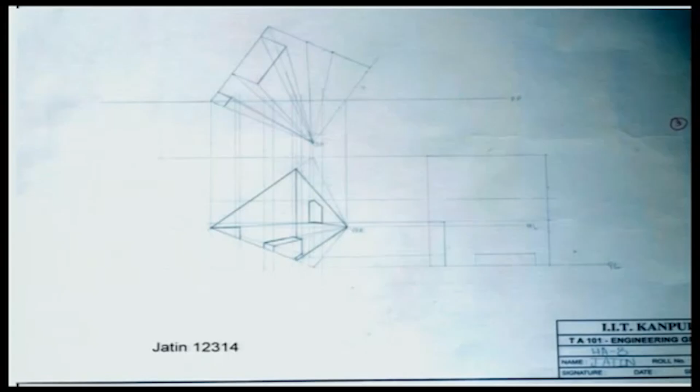Wasn't quite sure what he did, so he did not get much marks, but that's okay. Second, it's too large. And vanishing points and station point and horizon line, they weren't clear. Third, Virendra, is he there? Virendra? Okay, so maybe you took me too literally. So I said, well, just stand by your door and see how your room looks like. So you stood a little far from the door, but that's okay.

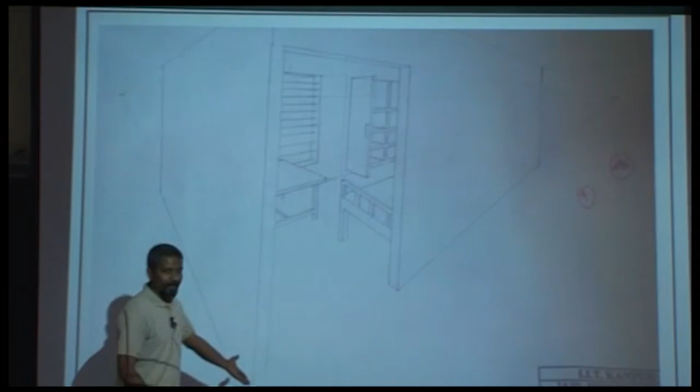As an art, it's wonderful. It's great. So possibly Virendra is standing over here, and he's honest. He shows what he sees. Yeah. Deepak, he took me too literally, so he went far. Deepak Kumar. Is he there? Deepak Kumar. So not only was he standing a little away from his door, maybe he went all the way up to the terrace of his hostel, and he is looking at his room from there. So that's okay. That's also art.

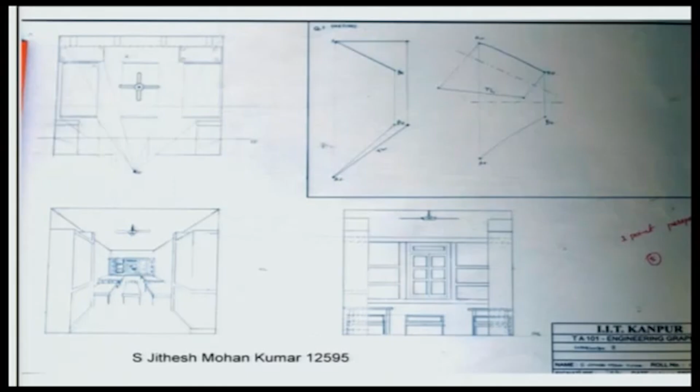Quite detailed. But I wonder what this is. Is this one of the home assignments or classwork assignments? Jithesh Mohan Kumar, are you there? Was this a homework assignment or a classwork assignment? Okay, but your drawing is quite detailed. Wonderful. But that was a 1-point perspective. Well, what you showed was a 1-point perspective. Good enough. So in some proportion, the marks that you have gotten will get added up to your total. So you'll only gain. Ravi Kumar, is he there?

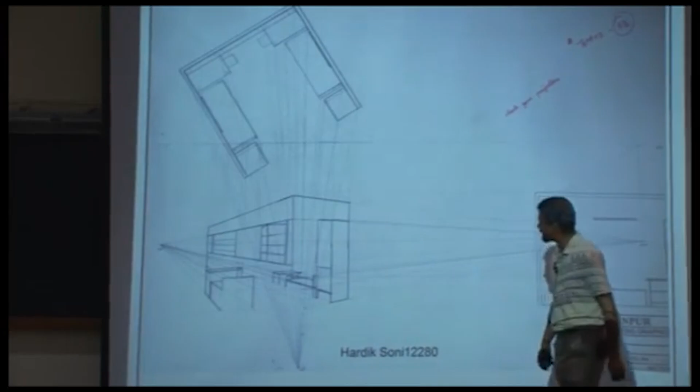Again, a single point perspective, but wonderful. Hardik Soni, not there, gone home. Pretty nice. He started off with a side view, a profile view, a top view, and he pretty much drew this perspective, 2-point perspective, but he decided to somehow work with lines. A table would have a little, so it won't have any thickness, but that's okay. Which one? This one? No, but if you look at this table, these are possibly rods. That's okay.

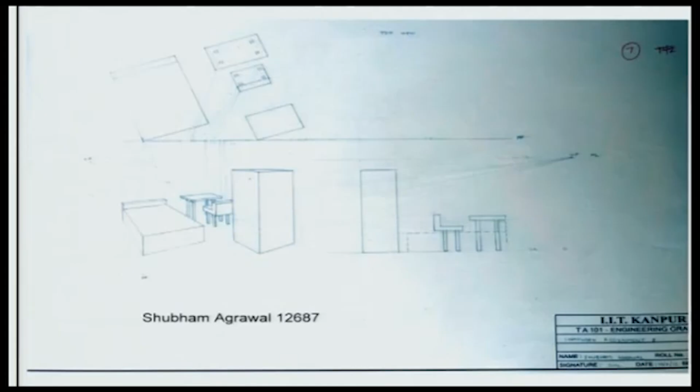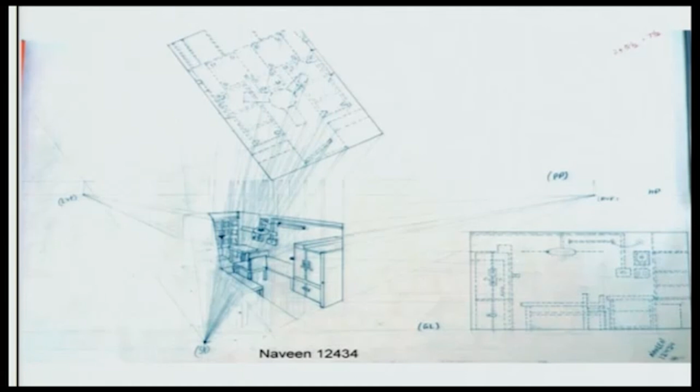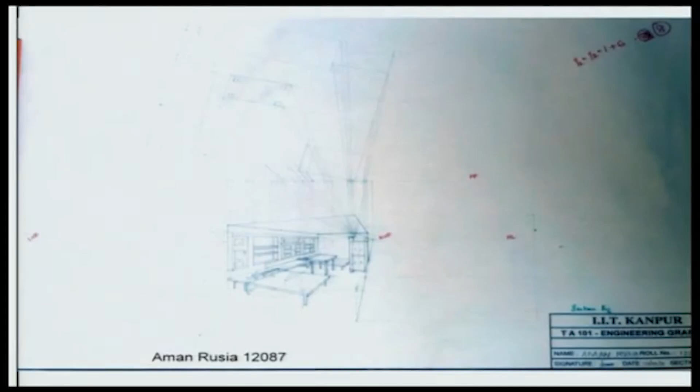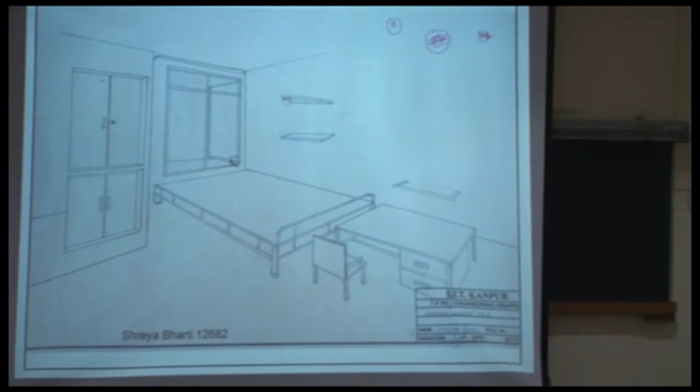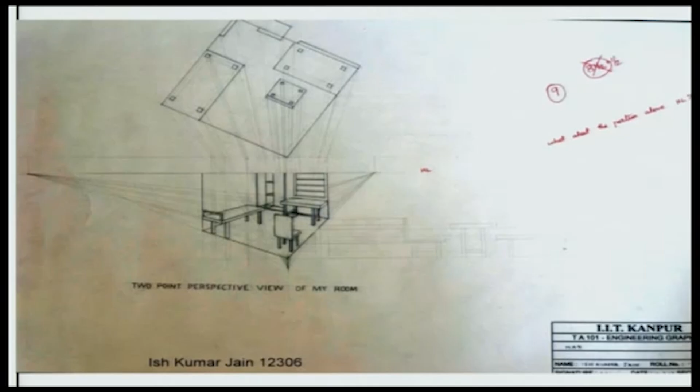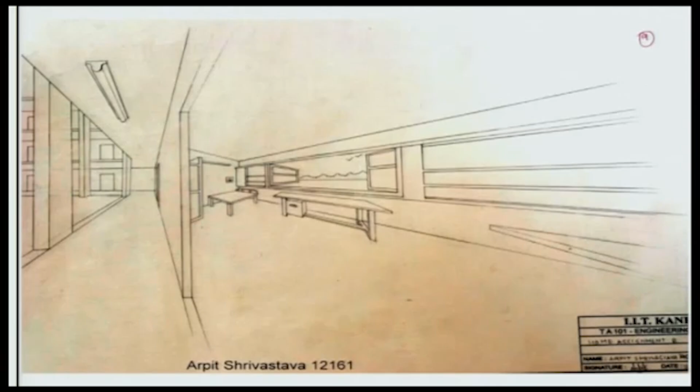So he's the first 9. There's a little story behind this. This person used 2 sheets. So this was the background sheet that he used, and his second sheet was this. Pretty nice. So I'm very glad to see some artists coming out of this class. So very nice. Arpit, yeah. Looks pretty nice, but somebody else wins. So the picture is not very clear, but if you look at the sheet, I'm not sure if we have the sheet here. Mohit, call it luck or what?

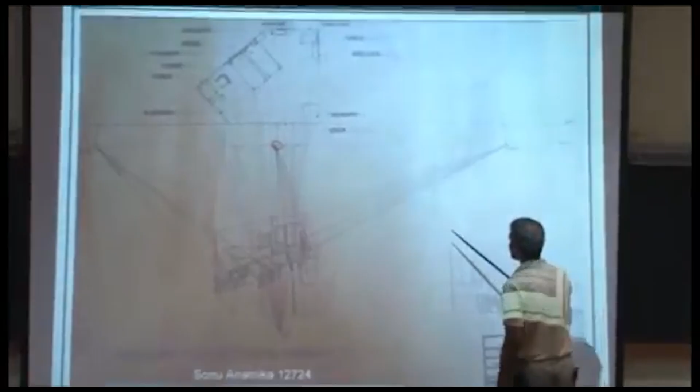Sonu has a pentagonal room. So she starts with a pentagonal top view, pretty much all the detailed information, the profile view here, and one thing that possibly went in her favor was that she was able to show that there's another vanishing point, the third vanishing point. So technically it was pretty good and it's pretty neat.

You know, for quite some time I was pondering what should I give, and the best thing that I could give you is... which I'm giving, ain't I? I am giving. Yeah, so more marks. All right. Huh? A.

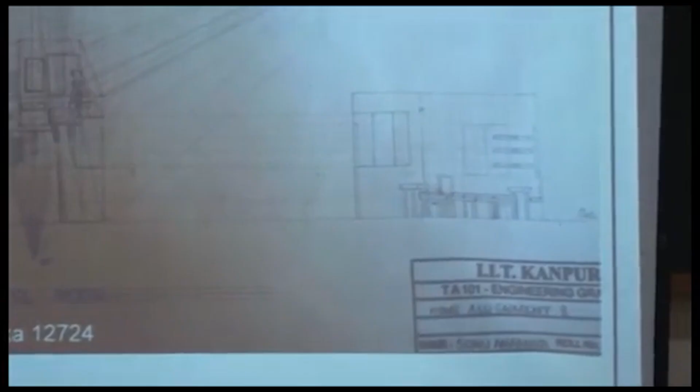Star. Okay. Well, let me wait till your end-sem exams are over. I will be, and trust me, I will be eager to give as many A's as possible, but I need your support for that. So if you do well in your end-sem exams, I'll be very happy to give you A's and many A stars. But if you do not do well in your exam, I won't have that support that I am looking for. So if you promise me that support, I promise you the grade. You give me support, I give you grade. Yeah?

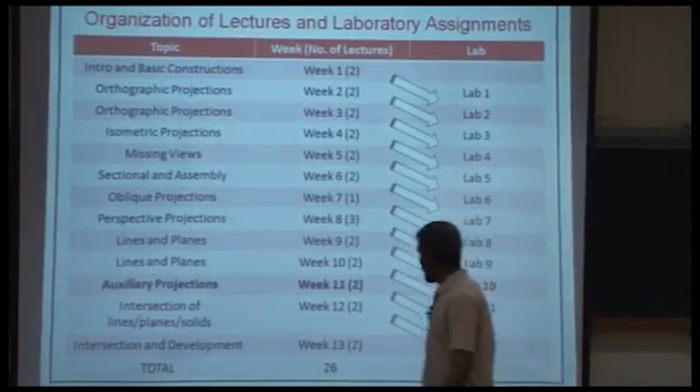Okay, so auxiliary views. So quite a few would have gone home, I believe, but that's okay. We discussed a simple example last time, so many of you were not here, but for your benefit, I'll probably go through this again. So look at where we are now. We are in the 11th week. We have, after this, 4 more lectures to go, 2 on intersection of solids and 2 on development. Okay, so you'll have to bear me for 4 more hours and the end-sem exam.

So this is the example problem that you will be solving in lab number 11, I believe. So you already have the solution. If you don't, I'll go through it. So we need to figure out the front view of this object and the top view of this object. And the trick is that 2 of the planes that you see, they are inclined. They don't get aligned with either the horizontal or the vertical, so it becomes a little difficult for you to draw the conventional orthographic view of this drawing.

So what you do? You take the help of auxiliary plane. Get the true shape of the object on these planes and transfer that shape correspondingly in your front view and the top view. Okay. So the center part of the object, it's not very difficult to draw, so maybe I'll just run through that. So it's a block, some dimensions, some protrusions coming out from the right, from the left, and of course this angle is given. I think it's 45 degrees.

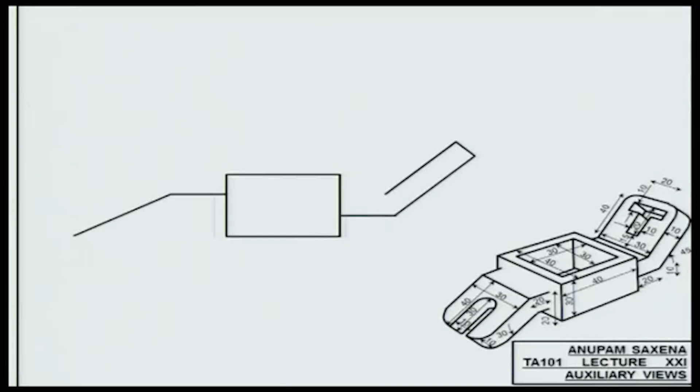So perhaps I can get the thickness of the planes on both ends. Okay, so this is the base, this is the primer, and then I project some features in the top view that I can. So from the top, it's going to be a hollow box in a way with some thickness. All right, so hidden lines, center line, and you have to do that.

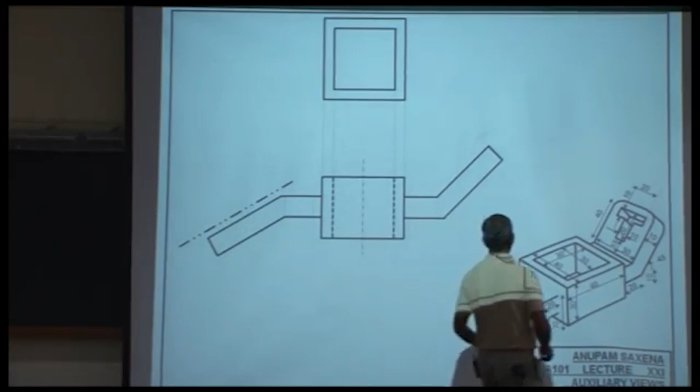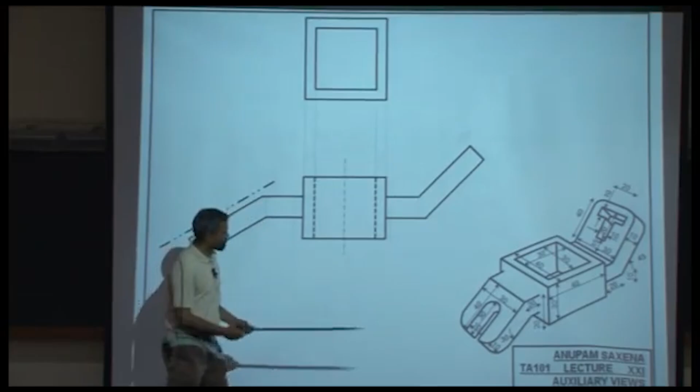So to be able to capture the true features on this plane and on this plane, you have to draw those features in the corresponding auxiliary views. So if you flip this plane by 90 degrees, you'll get the true features here, and likewise if you flip this plane by 90 degrees, you'll get the true features over here. So here it's a semicircular slot, and here you have a T slot. So let's try to get that. Yeah.

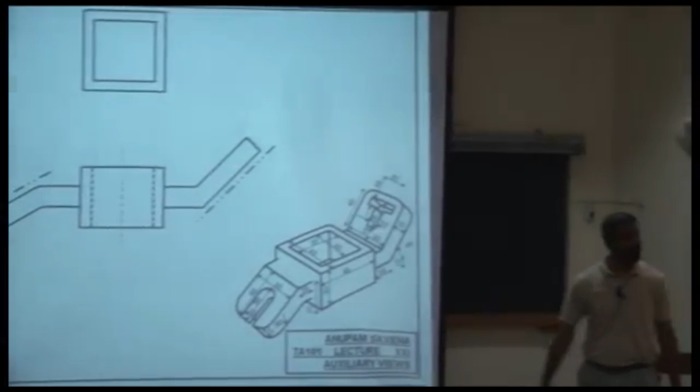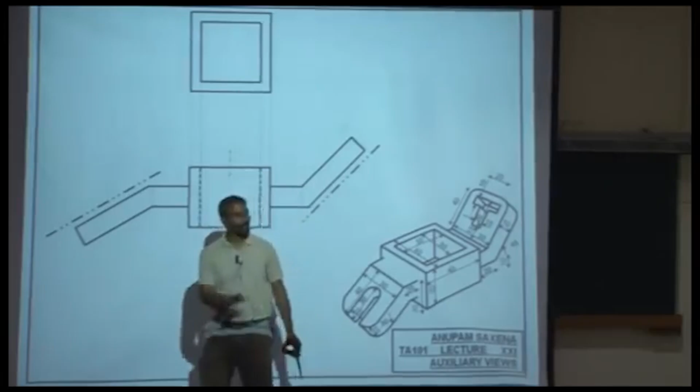Where? Here? Why is there a center line? Should be there, should not be there? Huh? Should not be there? Why should it not be there? Okay. Okay. It should not be there. Do you have an eraser? Yeah, well, just erase it. So ignore that. Okay, ignore that.

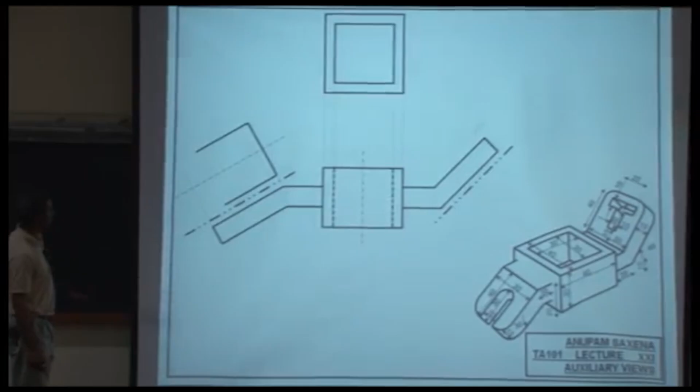All right, so coming back to the true features on that plane. So this length is going to be 30. From here to here is 30. This would be about 40. So this total length is 40. So you have to draw a few arcs on both ends, here and here. Okay, so get this slot. Not very difficult. Get the arc, and you have the true features on this plane, on the auxiliary plane.

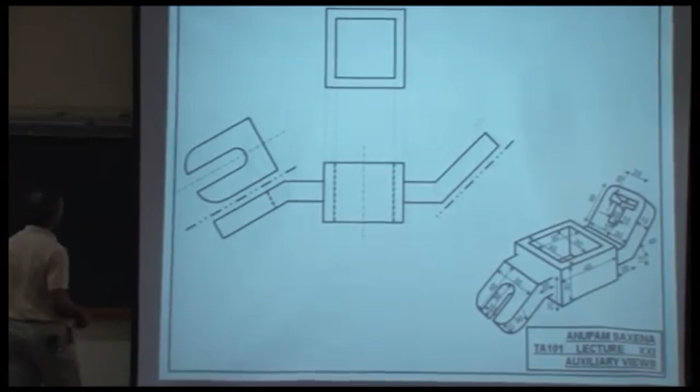The second one, is it okay for me to have the center line here? Huh? All right. And of course, once we have this feature here in the auxiliary view, I'll have to come back and update my top view, update my front view. So I'll have a dashed line corresponding to this feature, and on the right hand side, again something very similar.

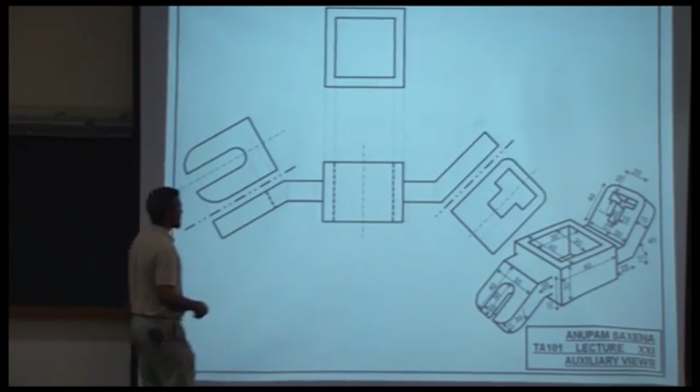Drawing that is not going to be very difficult. Okay, so it's a T slot that we have, and once I have this auxiliary view, then I come back to my top view and I update that. So I have corresponding hidden lines. All right, so is it okay for me to have a center line here also? Yes or no? Why not? Why? Symmetry. So this center line is representing symmetry.

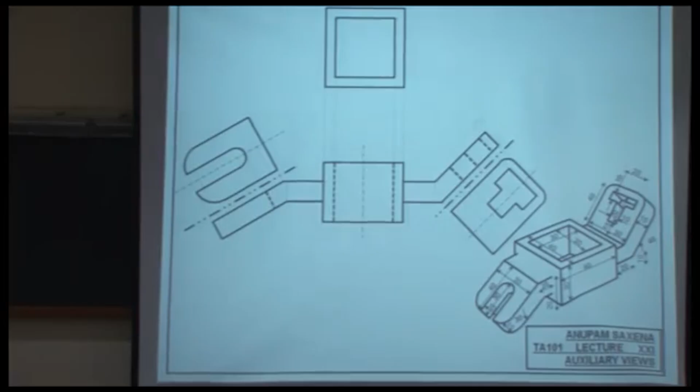All right, so is my front view done? Am I done with the front view? Or do I need to do something else? Yes? No? No answer? Am I done with the front view? Good. Not yet.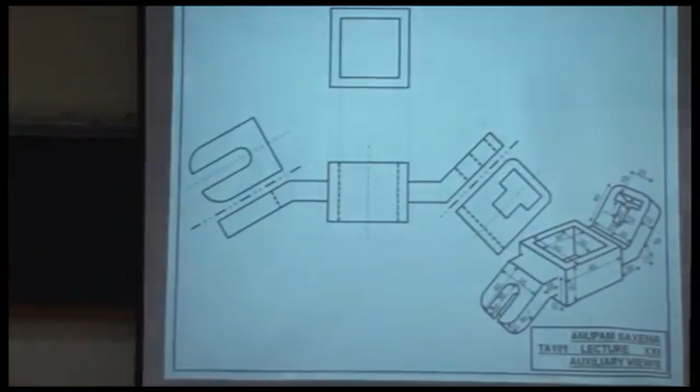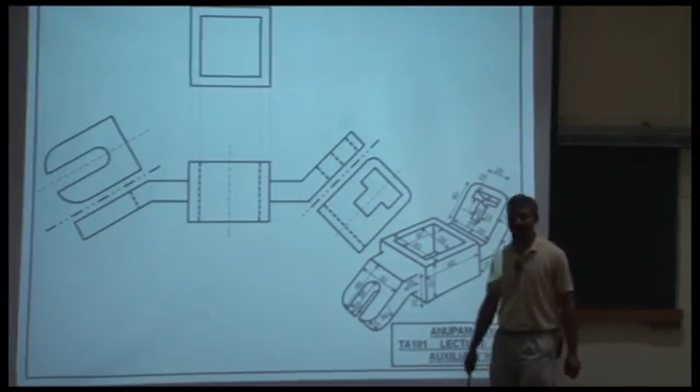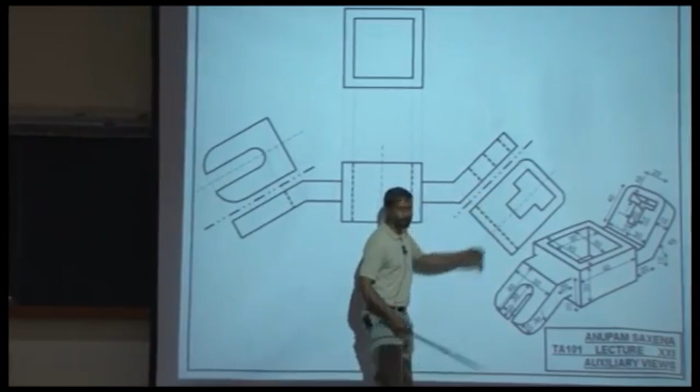How about this line? What would this line correspond to? Which one? This one or this one? This one. Should it be hidden? Should it be solid? Should be hidden line. Okay, fine. So because you have flipped this thing like so. And likewise, you'll have a line corresponding to this.

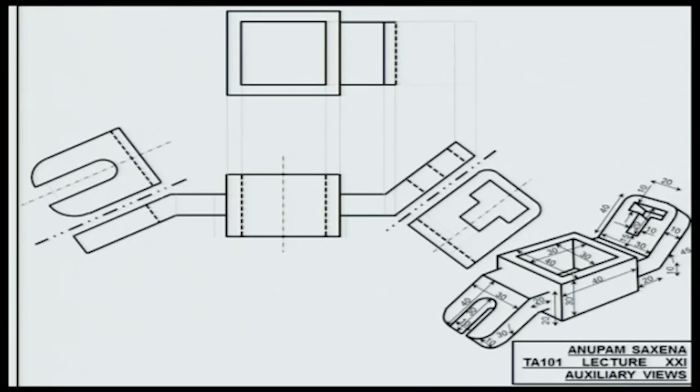So once your auxiliary views are finalized, start working with the top view, and this is where I would need your attention. This is where things get complicated, because transferring these features from here to the top view is a little tricky. So first get the projections, match the projections. Corresponding to this corner here, you'll be seeing a solid line. Corresponding to this one, you'll be seeing a dashed line. Center line, should I have a center line here? Because the object is symmetric with respect to that.

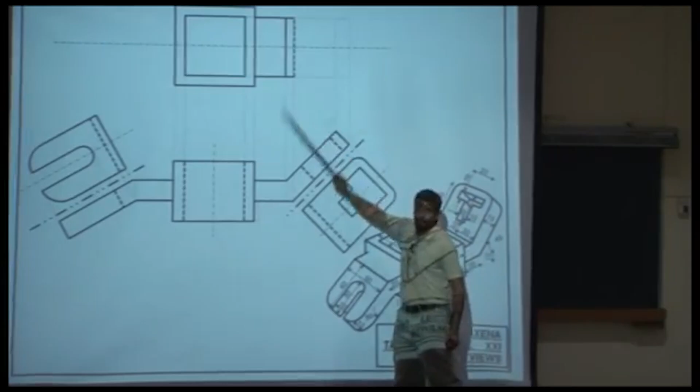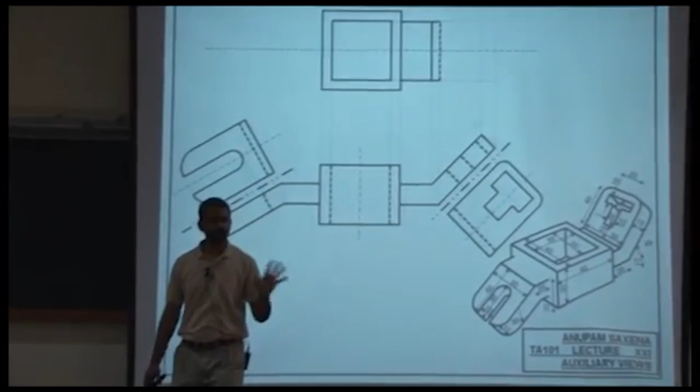Pay attention. We'll transfer these features onto this view. Now you must have studied, maybe 5 or 6 lectures ago, how to do that. Something very similar. So this is one of the views, a hinge line, second view, third view, right? So do you recall how we transfer distances? Exactly the same thing. All right. So I'm going to be projecting this feature up, and this is the tricky part.

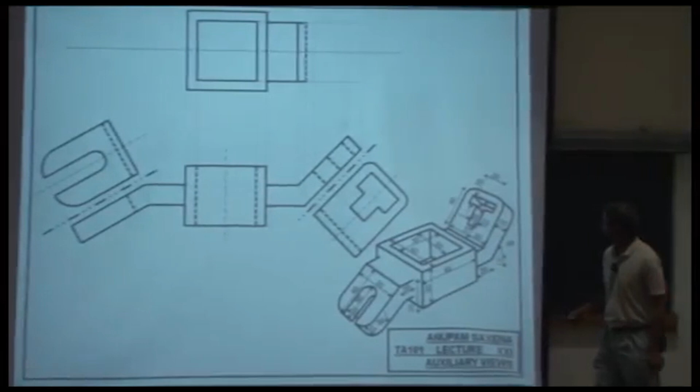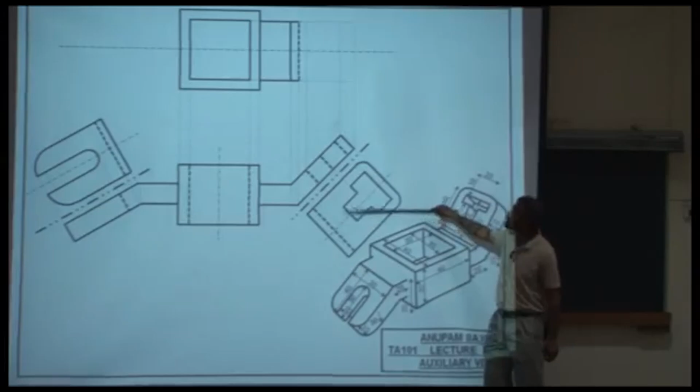I have not yet identified the hinge line that would separate these two views. And how would I want to do that? I already have the hinge line here, because if I don't do this correctly, then I'll mess up the transfer of features from this auxiliary view to here. Do you want to stay or? Okay. So you have to be able to locate this hinge line properly, because if you don't, you will mess up your transfer of points from this auxiliary view up to this top view.

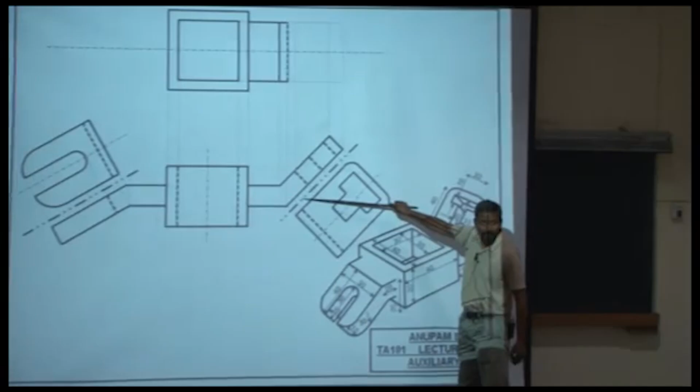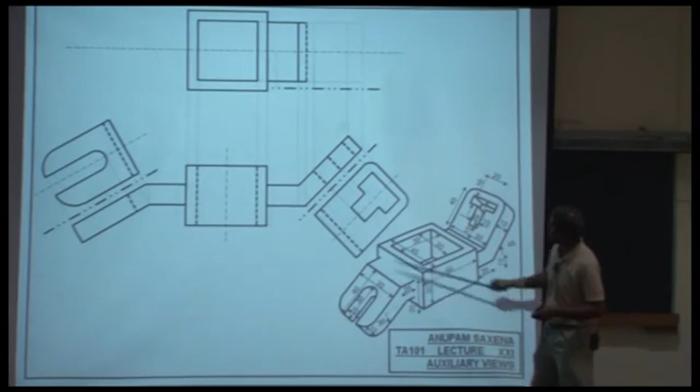Now what I do is I measure with respect to this hinge line. From this center line, I locate this point over here and I draw a local hinge line. Now this hinge line is local in the sense that it represents only the relation between these two views. Once I have located the hinge line, the rest becomes simple. I'll measure this distance. I already have the projector up over there. I'll transfer this distance over there. Likewise, I measure this distance and transfer it over there.

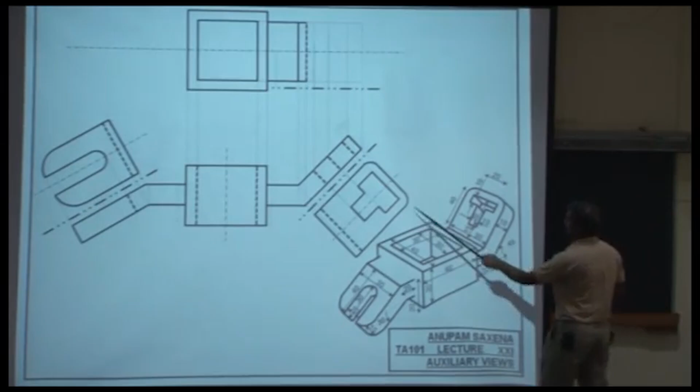And what am I doing? Now I'm measuring this distance. My projector is here, so I'm projecting the top face now, not this face. Measure distances, transfer distances. And then project this up over there, measure this distance, transfer that distance. Once I have all those distances over there, it's easier for me to make this T.

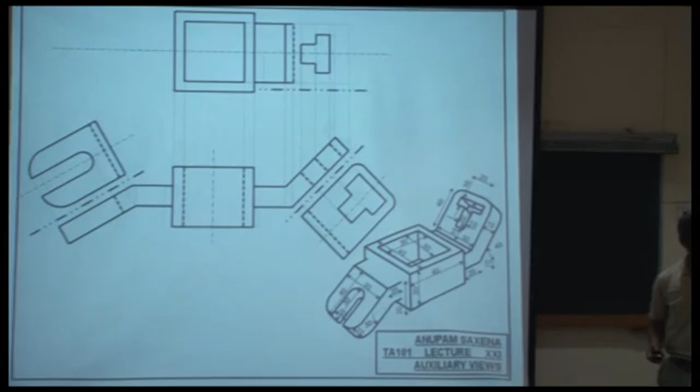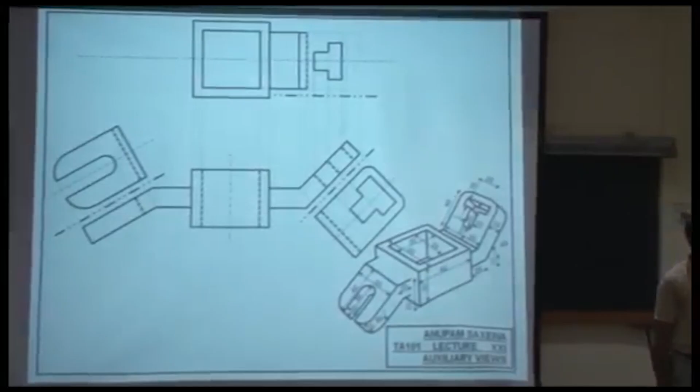Why are we not drawing it using the original dimension? The length dimension will not be shortened by any factor. Only the breadth is shortened by the factor, which I can get from the projection in the front view, and the one in the other direction remains the same. So what you're saying is these distances remain the same, and it's this distance that gets foreshortened. Yeah, if you want to draw this directly, you could do that. I'm just explaining the procedure. For more complex looking objects, it may not be feasible to draw it the way you want to.

All right. So having worked on the top face of the object, now working on the bottom face of the object. Exactly the same thing. Okay, a part of T will be visible and a part of T will be invisible. So this part inside the previous T is going to be visible. Okay, this part is not going to be visible. So it's going to be shown using hidden lines. Okay, so this part of T is right there.

Where am I? Okay. Now, how about this arc? That you cannot draw directly. So you'll have to take projections and you'll have to measure distances precisely. So look at this arc, transfer this arc over from the front view to the top view. So discretize that arc into a number of small segments.

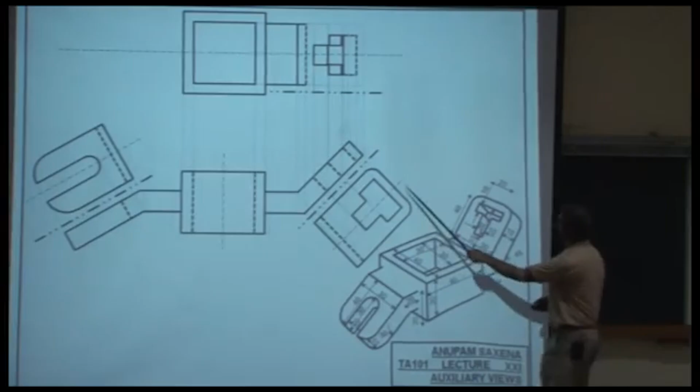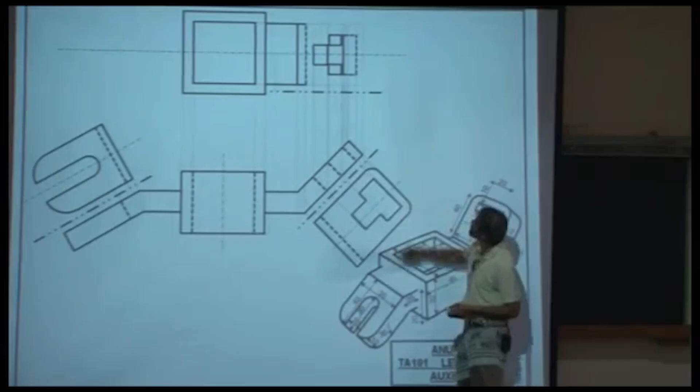Do you see these lines? Do you or you don't? You don't. So there are a few lines over here. So discretize this arc. Measure distances from the hinge line to different points on the arc. Draw the projectors from here. Measure these distances, light green lines. Transfer them over there. Okay, here. Right? So once you get those distances, then it becomes a little easier for you to draw the arc. Okay?

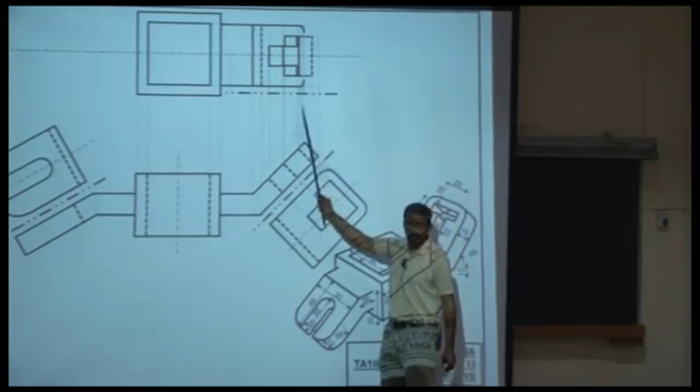Likewise, on the top, draw the horizontal lines. Okay? Is this going to be visible or is this going to be hidden? Visible. How about this? And would the arc corresponding to this plane here be shifted to the left or right? Shifted to the right. So once you have gotten this arc over here, if you're smart, you can just directly shift that arc to the right by the requisite amount, or you can take the projections from here, and get that arc at its proper location.

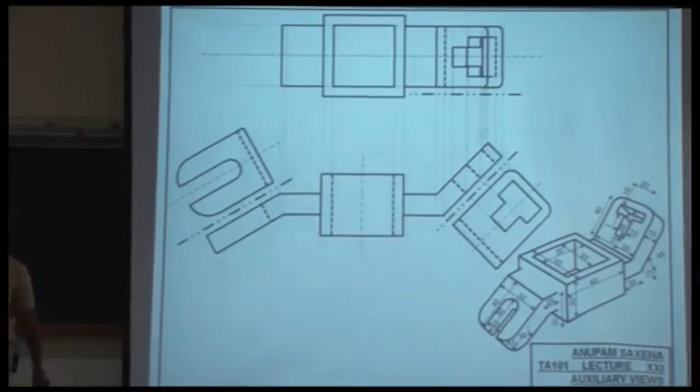So the top view becomes a little difficult to work with. Okay. Likewise on the left, exactly the same thing. So you have this edge drawn. The edge corresponding to this corner will be visible. How about this corner? Visible, invisible, hidden. And then start taking projections, start measuring distances, transfer distances, and get your top view in order. This is for the arc. Likewise, on the top, that part is going to be visible. Okay.

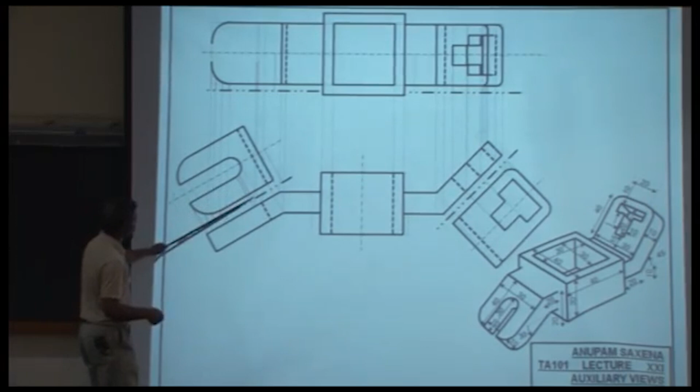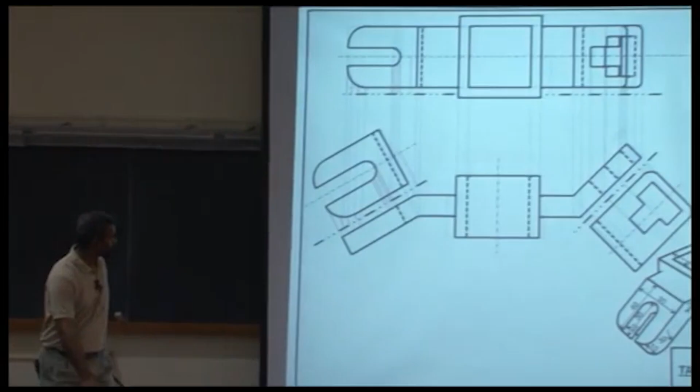How about this arc? Exactly the same procedure. Discretize this arc into a bunch of points, measure distances of this arc from the hinge line, and transfer those distances onto your top view. Likewise on the top, join these guys. This is for the top face. How about the bottom face? Yeah?

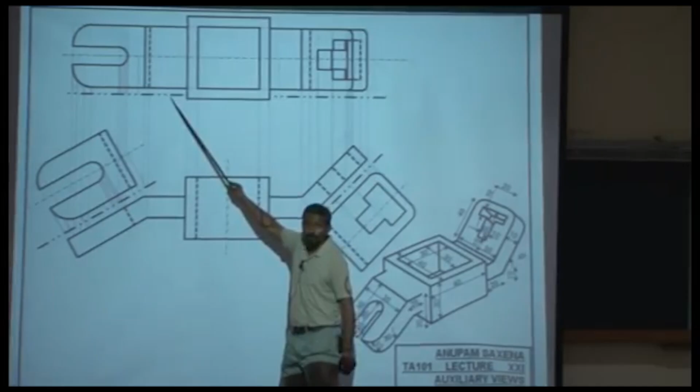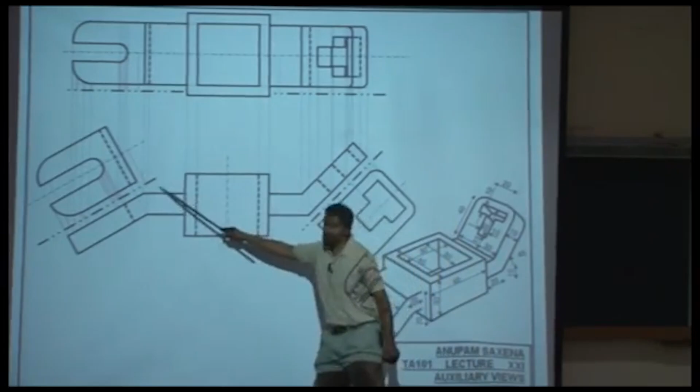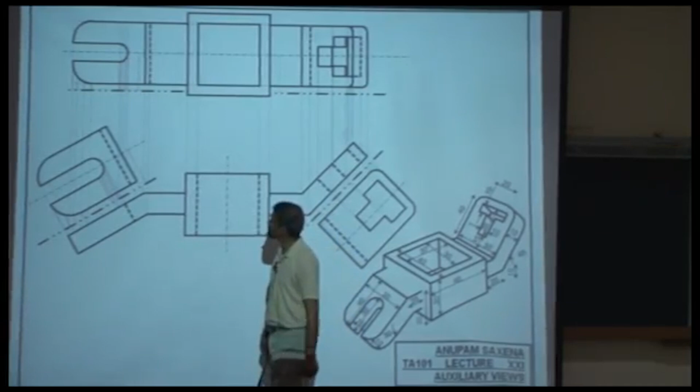So if you don't want to measure the distances from this hinge line, yeah, I'm coming to that. So let me see if I've gotten you right. If you don't want to measure distances from this hinge line, rather if you want to measure distances of these points from this edge, you can use this edge as reference and transfer distances accordingly. Is this what you're aiming at?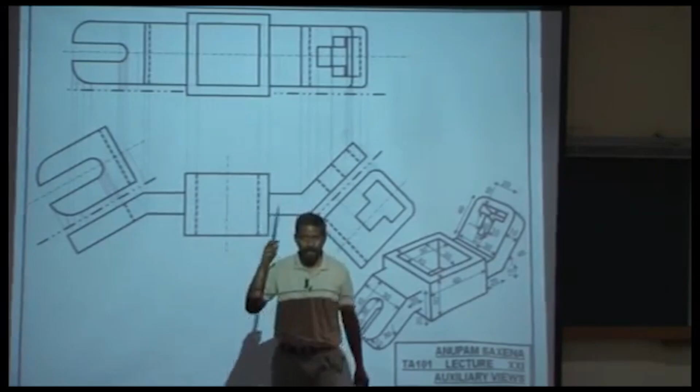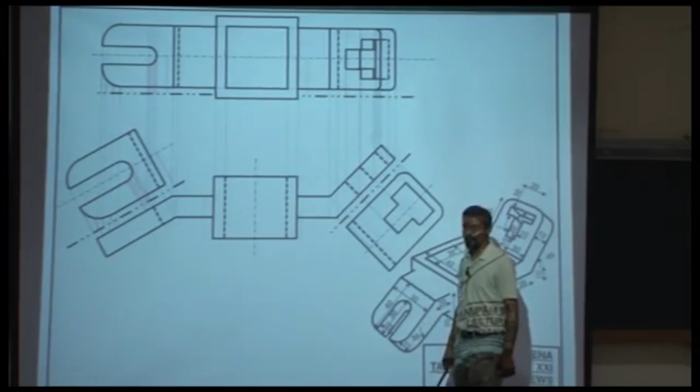Yeah. But in the upper figure, we measure distances from the hinge line that we have drawn, but instead of showing this as the hinge line, we show that there is a common hinge line for the whole view. You can, which is what I'm saying. You can, but you'll have to be a little careful. If you want to show a common hinge line that separates this view from this view, you can. But when you do that, the location of this hinge line and this hinge line, they will be related. This is what I am referring to.

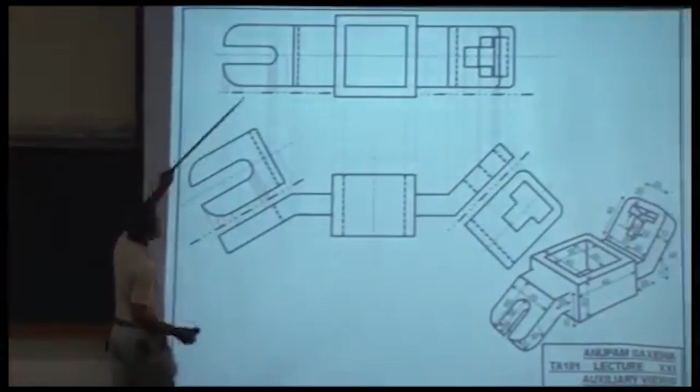So after the mid-sem break, you're going to be working on this example. So try it out. If you choose to represent both these hinge lines by a single hinge line, then make sure that these distances are properly correlated. At this time, they are independent.

You see what I mean? Or maybe we'll discuss this. Yeah.

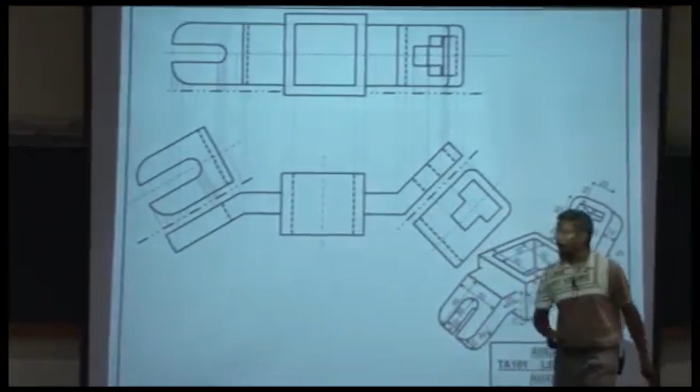All right. So how about the features on the bottom face? This face here. Identical procedure. Okay. So of course, like you see this arc over here, you will also see something very similar at the bottom face. But if you look at the top view, this arc will get shifted inward. Okay, and since this is at the bottom, this would be shown using hidden lines.

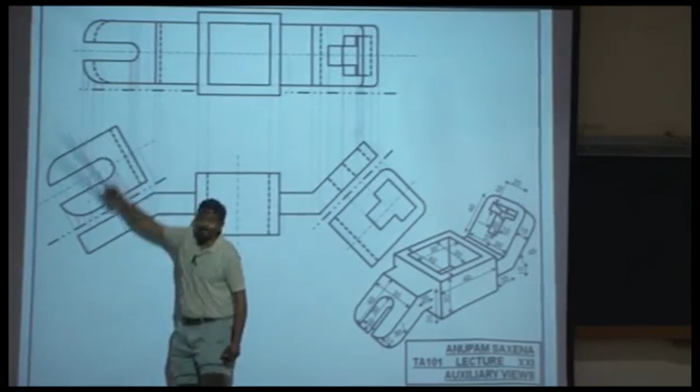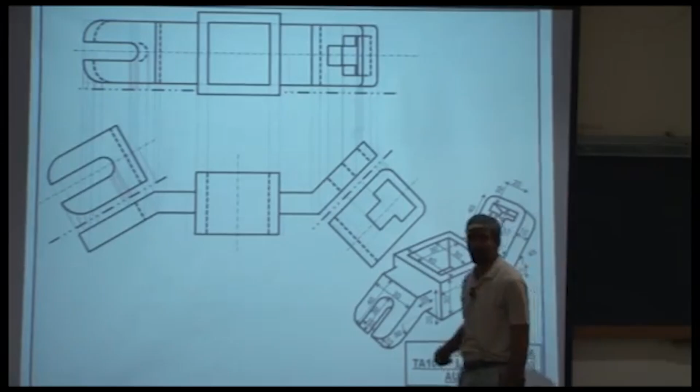Likewise, the inner slot over here, this will get shifted inward corresponding to the bottom face. Okay, and it will be shown using hidden lines. Okay, did I miss out on anything else? Is everything there? Sure? All right. So

Why? Because I'm leaving you 10 minutes earlier? Yes, sir. You're too bored with TA 101, is it? Why are you bored? Huh? Time consuming? Well, if I have made you work a lot, I'm not sorry about that. They should increase the credit. They are only 9 credits for TA. No, but it's not their fault, it's my fault. I'm making you work harder, nah?

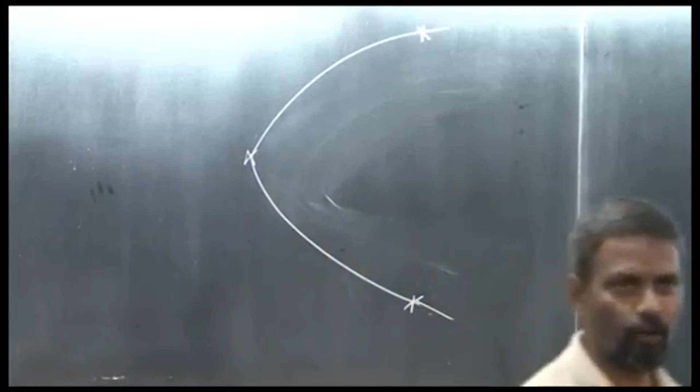Given 3 points on a hyperbola. Let's say this is your axis and your hyperbola is symmetric about this. How do you construct it? Pardon my drawing. I mean, it should have been more like that. Given 3 points on a hyperbola, how do you construct it? I'm not interested in the algebraic solution. I'm interested in the geometric solution. How do you construct that?

Huh? See? Think and analyze. If you have done your TA 101 well, maybe I can expect a solution from you guys in another 5 or 10 minutes. But if you have not, they're symmetrical. But I need only one of these points, not two. How do you construct this geometrically? Given 3 points on a hyperbola.

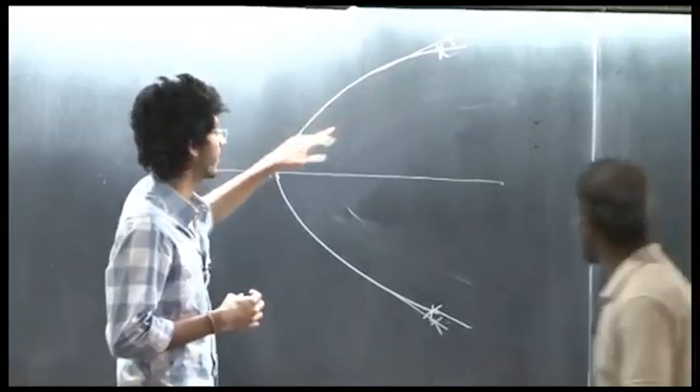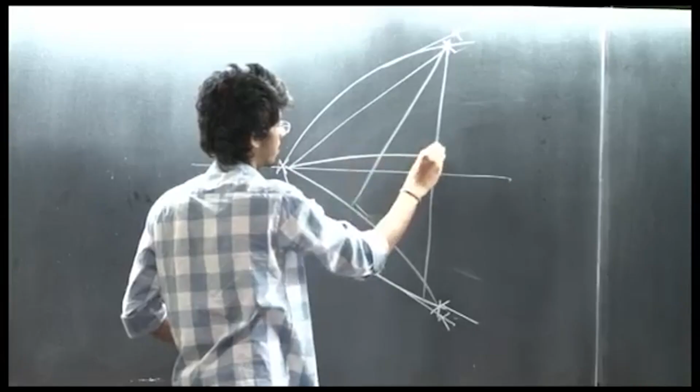So we construct this triangle? And we find the orthocenter of the triangle, which lies on the hyperbola. You have a piece of chalk? Take a piece of chalk and explain it. This point will lie on a hyperbola. Well, these 3 points are lying on a hyperbola itself. 3 points are given on the hyperbola. So these 3 points are already there. How would this point lie on a hyperbola? The orthocenter of the triangle lies on the hyperbola. It's a property. Yeah, fine. So construct it. Construct it.

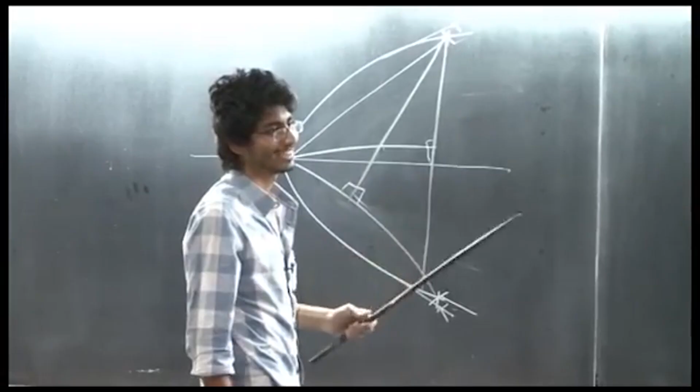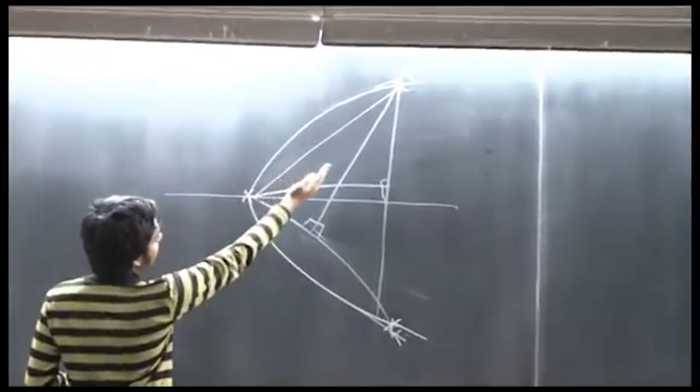Yeah, anybody else? Perhaps it's like this, that take any axis, take the mirror images of these points. Okay. So the points where they intersect, the corresponding concentric circles, those will give the points of the corresponding hyperbola. Sure. Most probably. So can you verify that? That'll take some time? Okay. What? There is. There is. Using that point, we can... There is a very obvious solution.

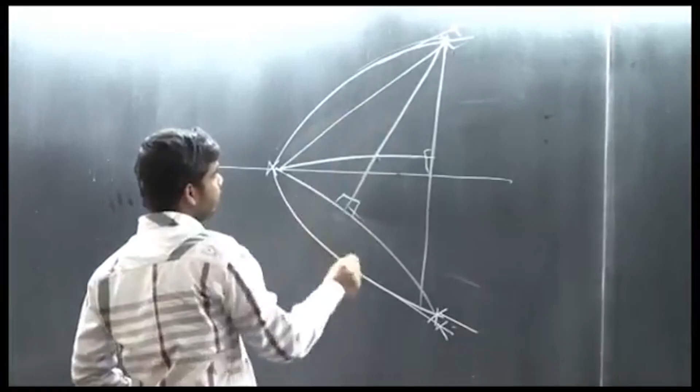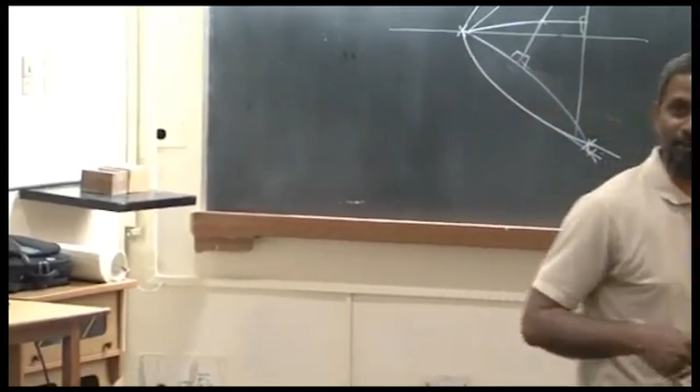Yeah? Now, how you say that the orthocenter of a triangle lies on hyperbola. So we got 3 points. Now we got 4 points there. And these 4 points and 4 lines. Now I guess I should be saying TA 101 is so difficult. I have absolutely no idea about these methods.

Alright, so when you return, and please do return after your mid-sem break, we'll talk about these interesting aspects of TA 101, intersection and development. So it's pretty fun, a lot of work, but pretty fun also. So happy Holi, go home.